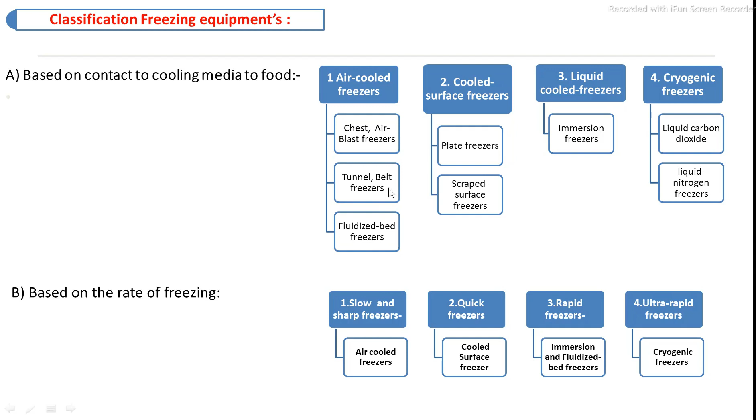The first category is the air cooled freezer, in which the cooling media, that is the cold air, is directly in contact with the food material. Its main types are the chest, air blast, tunnel, belt, cabinet type freezer, then fluidized bed freezer. These are the main examples of air cooled freezers.

First one is the chest freezer, the simplest type, a cabinet type freezer, in which the bottom of the freezer is fitted with the refrigeration system, and the refrigeration pipes circulate throughout the inside of the insulated body. It may be single door or double door, with capacity from 100 liters to 1000 liters.

The main disadvantage is that the freezing time required is more: 3 hours to 72 hours depending on the total load and the size of the raw material. This type of freezer is only used in small scale industry, restaurants, hotels, and for the transportation system. This is the simplest type of freezer.

Then second, the air blast freezer. This is slightly advanced from the chest freezer, in which the circulation system is provided. You can see the air blast freezer. It may be tunnel type or cabinet type, with loading capacity from 1 ton to 5 ton, 10 ton; they are constructed as per the industrial requirement.

This is a completely insulated chamber; this is the door, maybe tunnel type. Two doors are fitted at the inlet and outlet section. The doors are also provided with insulating material and heaters. This is the refrigeration system. These are the evaporation pipes along with the fans. You can see these are the fans. Inside of the fan are the evaporation pipes.

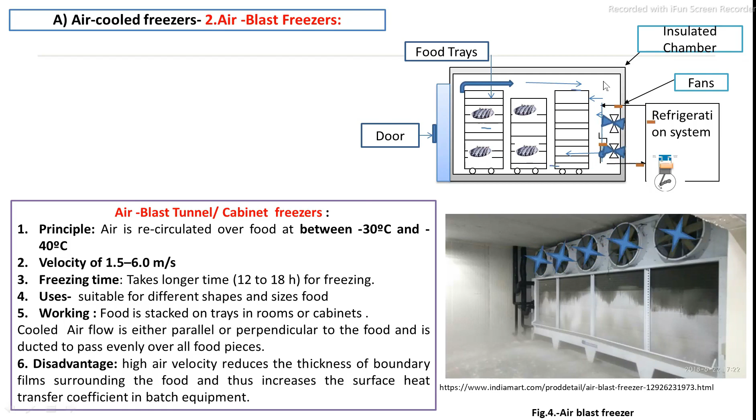You can see in this picture the total construction of the air blast freezer; this is the inside portion and this is the outside of the cabinet. Outside of the cabinet is the refrigeration system, with the compressor, condenser, expansion valve, and then the evaporator. These evaporation pipelines are inside the cabinet freezer. You can see this is the fan, inside of which the evaporation pipelines are fitted.

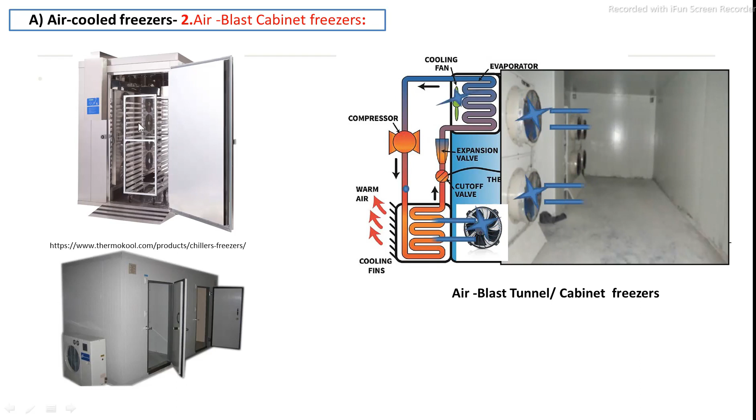Cold air at -30 to -40 degrees Celsius is continuously blasted on the loaded food. Foods are loaded on the tray, then loaded into the trolley. The trolleys are loaded inside this cabinet.

The next, slightly advanced, is the belt conveyor freezer, in which food material is continuously moving on the belt conveyor. You can see this is the completely insulated chamber.

Inside the insulated chamber is provided a perforated belt conveyor system, through which the packed product, or maybe unpacked product, is continuously fed from this feeder. Then the food material is moved on the perforated belt conveyor.

The refrigeration system is provided at the top or maybe to the side of this tunnel. In this refrigeration system, this is the compressor, then condenser, expansion valve, and then these are the evaporation pipelines along with the fans. Cold air is continuously blasted directly on the conveying food.

In this system, the length of the belt conveyor is designed as per the raw material size and the time required for the freezing. Generally, the time required is 10 minutes to 3 hours depending on the size of the raw material.

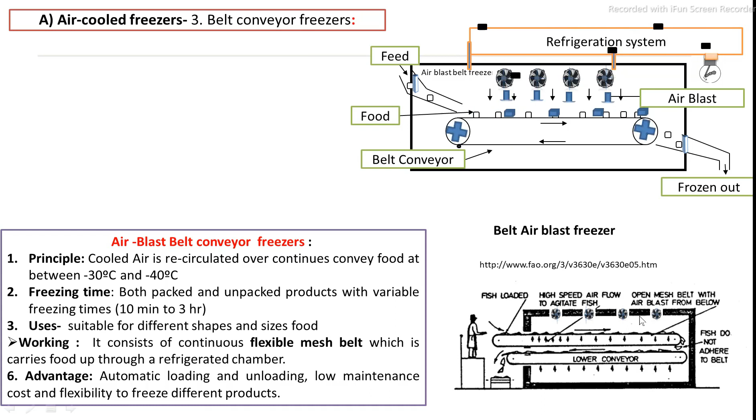This is also the same process, in which the feeding is by the belt conveyor system, then a second belt conveyor system, and then the frozen product is out. You can see at the top the evaporation pipelines along with the fans for blasting -30 to -40 degrees Celsius chilled air.

Next category is the spiral conveyor freezer, which is slightly more advanced than the belt conveyor freezer. The main advantage is the space requirement is very low compared to the belt conveyor system. The conveyors are the same as the belt conveyor system, but they are converted into a spiral way. You can see the loading and unloading facilities are provided.

This spiral conveyor system is mostly used for small size food, in which IQF, individual quick freezing, is carried out. Individual quick freezing is carried out within 2 to 5 minutes, to a maximum of 10 minutes, depending on the size of the food material.

You can see this is the complete insulated chamber in which the food is loaded in this way. Then these are the spiral belt conveyor systems. Finally we get the frozen product at the top, with continuous blasting of cold air inside this chamber at -30 to -40 degrees Celsius.

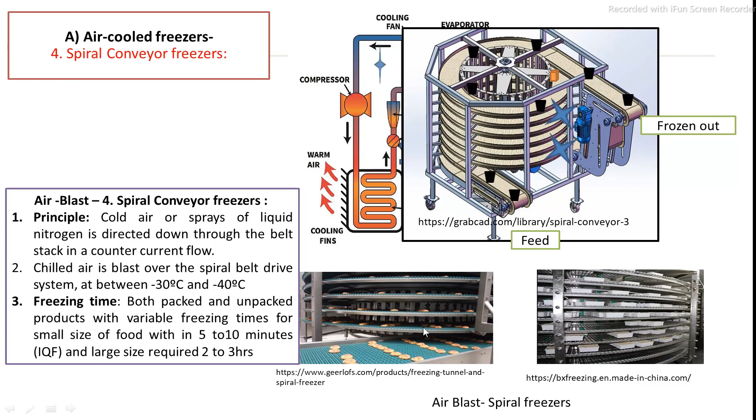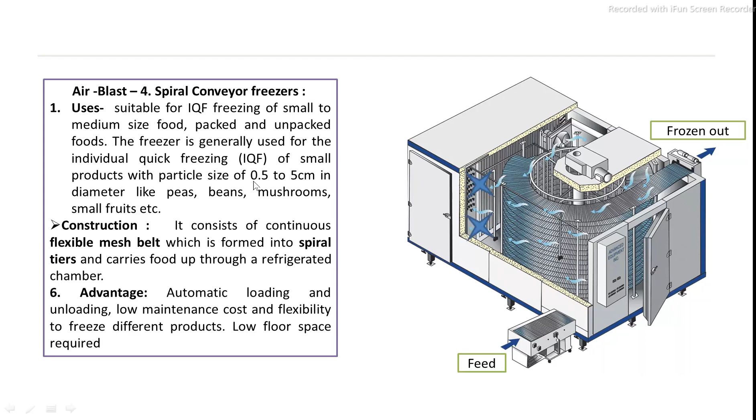In this system you can see the complete spiral freezer, inside and outside provided with the refrigeration system. Freezing may be carried out on packed or unpacked product. Inlet section, then spiral conveyor system, then the outlet section. The main application is IQF at particle size 0.5 to 5 centimeters. These are the examples.

Next, the last one is the fluidized bed freezer. Fluidized bed, you can see this is the bed. Fluidized means it is a mixture of solid particles, that is the food material, along with the cold air. This is the fluidized action, with chilled air blowing from the bottom.

This is the vibrating conveyor. The vibrating conveyor and the chilled air blowing from the bottom result in the fluidized action. The bed size is in the range of 2 to 13 centimeters. This is also the same, with the feeding of the raw material. This is the vibrating conveyor system. Raw material moves along the bed with the vibration action.

Chilled air blows from the bottom, and the chilling process is carried out with the refrigeration system. Finally we get the frozen product. It is mostly suitable for small size food, in which IQF processing is carried out, with a freezing time of 3 to 11 minutes, that is, a quick freezing process.

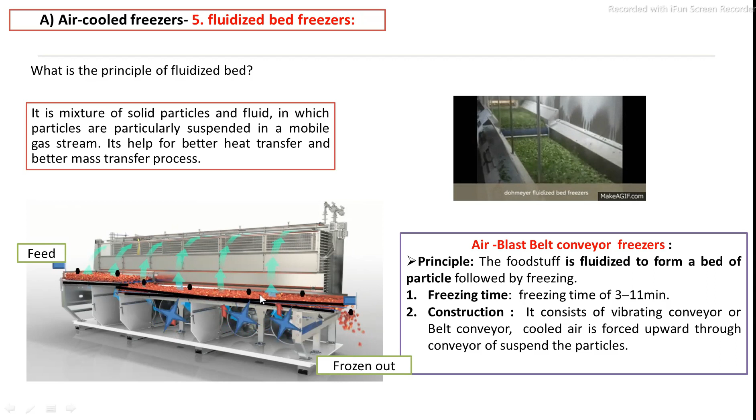This bed is continuously vibrated by the perforated vibration system at the bottom, and raw material moves up and down with the vibration and is continuously conveyed from the inlet to the outlet section. It has the same construction as the fluidized bed dryer.

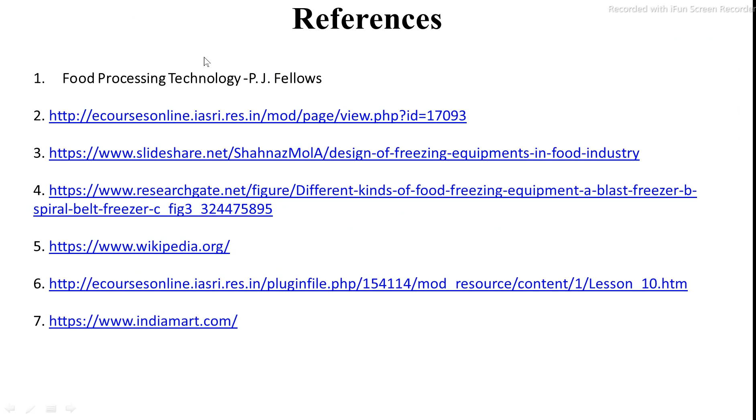These are the references used for the preparation of this PowerPoint presentation. In this video, you learned the cold air freezer equipment in detail: its construction, working, and application.